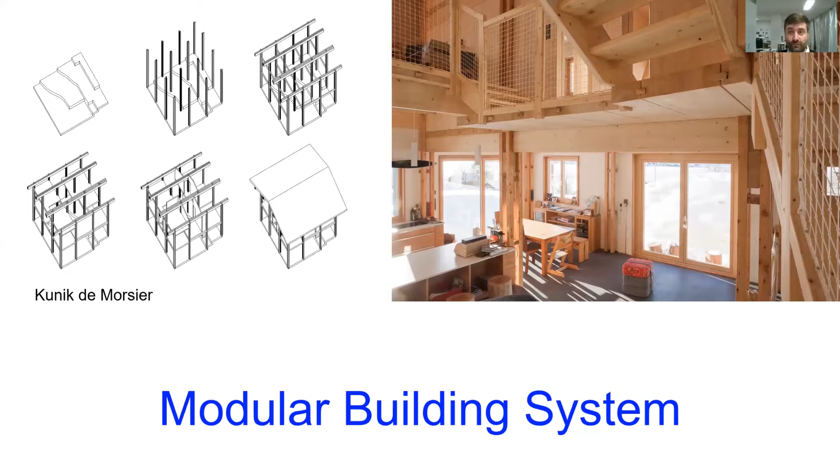Here you see the house, and you see the upper level, so to say, and the external items.

From that, we developed a series of competitions. This is one example where we try to go further in this idea to use wood in a structural way, and also use all the cutting technologies that we have here in Switzerland. We noticed that every timber builder has a CNC router, and that it's really easy actually to build complex structures. They use it to build very simple things, to cut simple pieces, but we could really go further in that and bring complexity into reality.

So it was an interesting competition. Unfortunately, we lost it, but the idea was to see how we can fabricate slabs that are not horizontal, but where the geometry is optimized to catch as much daylight as we can in the winter time.

And this geometry was really simple, or is really simple to build out of wood, because even if every piece of wood has its own geometry, it's machined, so there is no need of calculation. Everything comes out of the computer somehow.

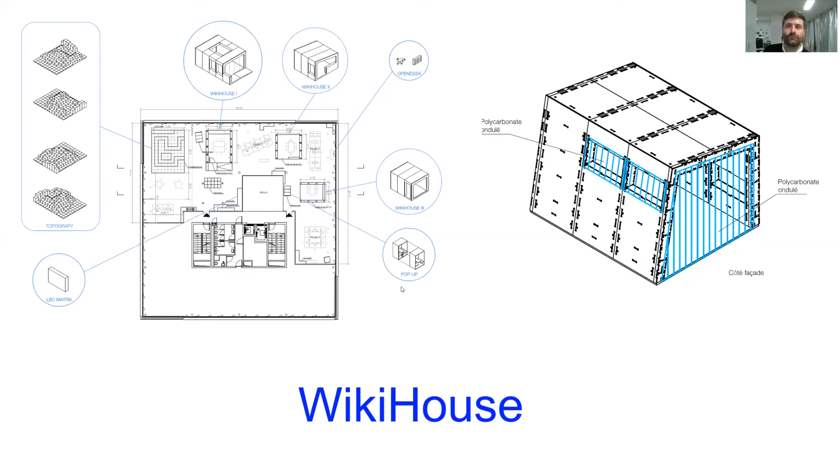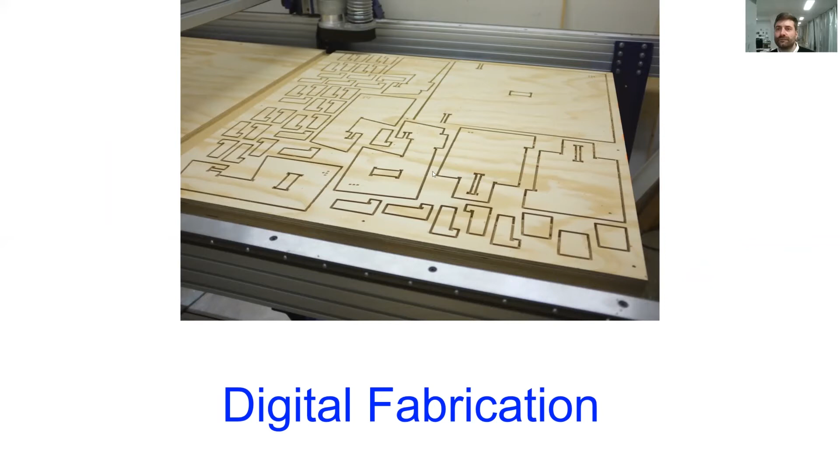It's really interesting because it works with only one type of timber panel, and everything is cut on a CNC router like this. All the pieces are extracted automatically and then printed at the carpenter, then assembled on site.

What's really interesting is that the system is lightweight, so you can handle every piece of that puzzle, and it's really quick to assemble. You can reach any shape that you need for the space. In that project, we built 3 different types, each with different acoustic conditions, light conditions, etc.

This is the second project I want to show. It's an industrial project, a big hall, and we also had to make a lab space and office space where there are boxes for meeting rooms, but also for labs, white rooms, dark rooms, etc. For that, we used augmented reality.

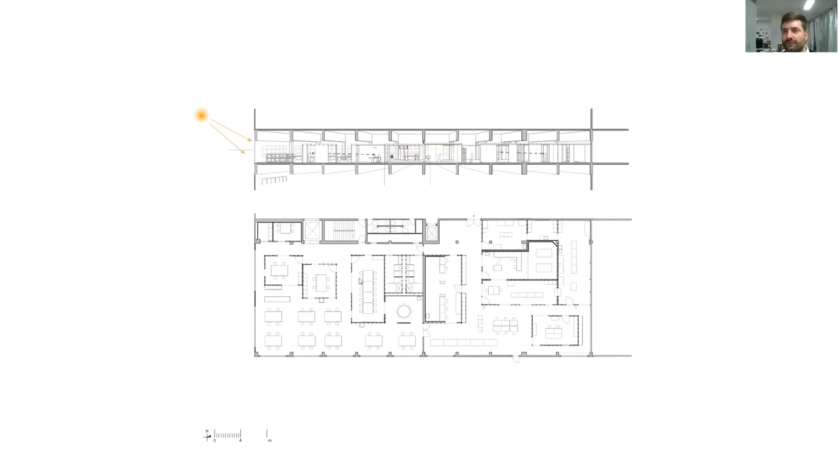I'll show you. So the first step was, since it was an existing building, to see how we can use daylight simulation to optimize the position of the boxes in the space. From that optimization process, we ended up with one optimal solution.

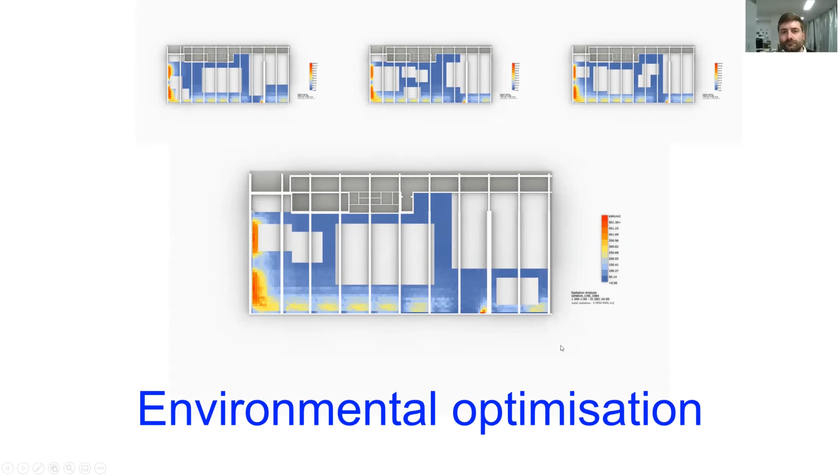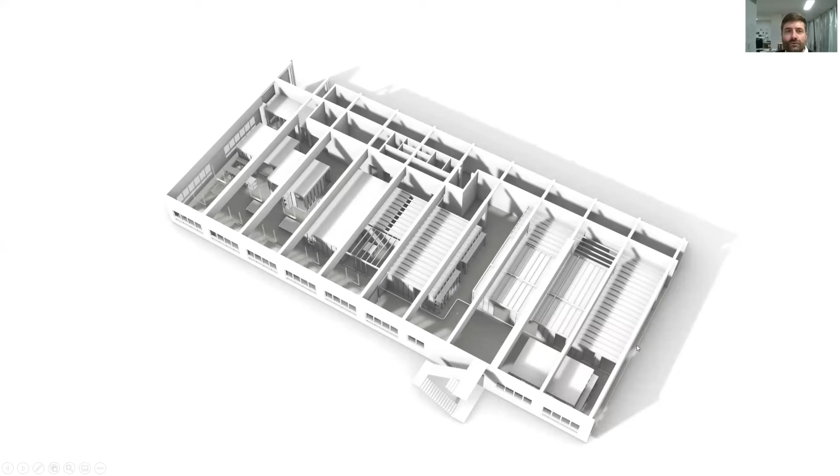This is the 3D model. We worked directly with the timber construction constraints, so you see the different layers. These are the roofs made out of foil, here are the hard roofs, the lighting system, and this is the 3D of the space.

This was made on Rhino. We tried the 3D, and from that we used a Fologram plugin that allows you to send the Rhino 3D model either to a tablet, a smartphone, or to HoloLens 1 and 2. So this is the space.

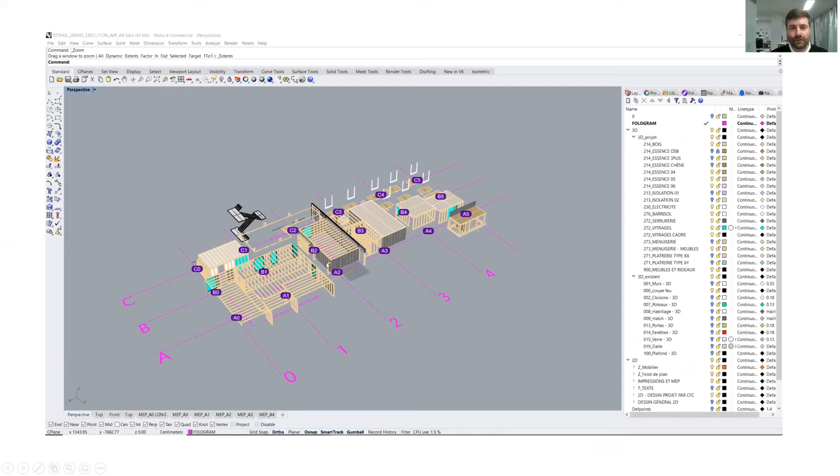We made a grid on the space, and on each point we made QR codes like this. This QR code allows you to geo-localize the project in the space.

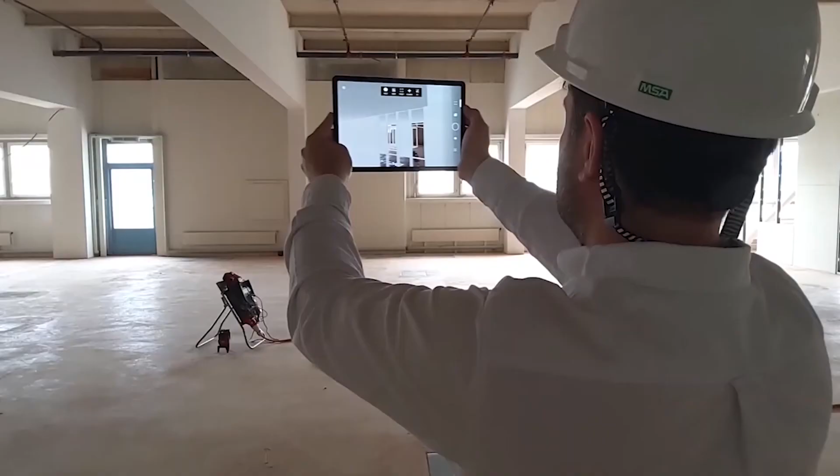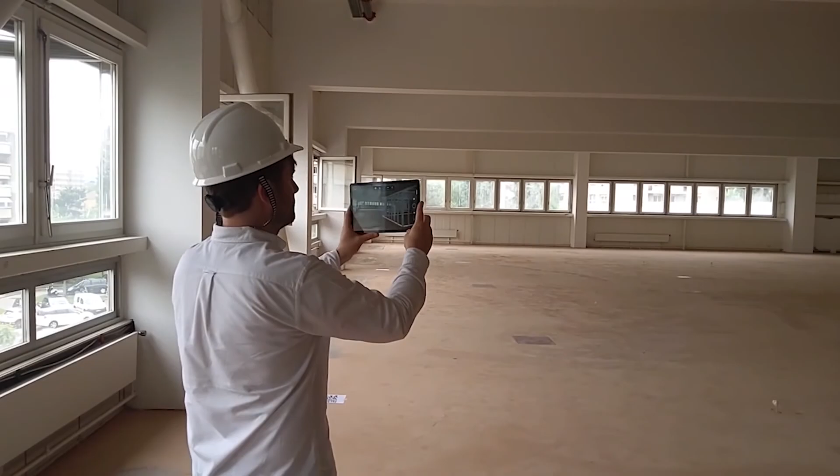I'll start a small video where you see I snap the QR code, and then the 3D model is overlaid on my tablet. So you can go through the space with the contractor, the stakeholders, the client, and the users, and test several versions.

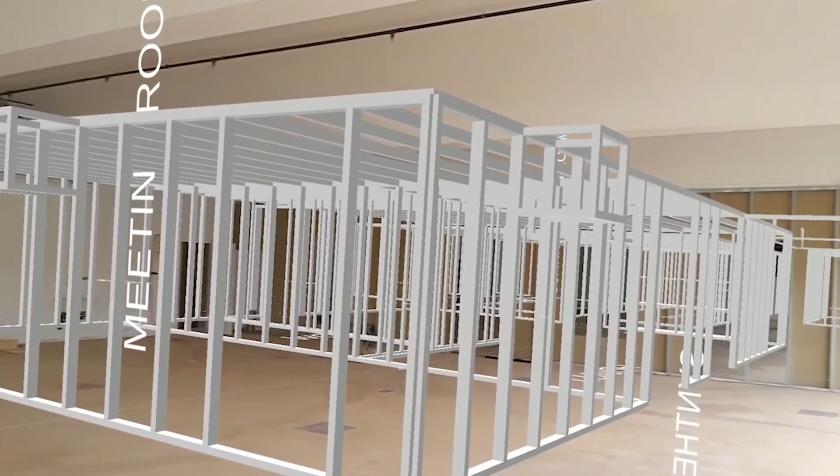Then you confront the project one-to-one with reality. It was really interesting for the clients, but also for the contractor, because we could see conflicts with the technical installations and so on. This is then 2 or 3 weeks later when we brought the timber elements.

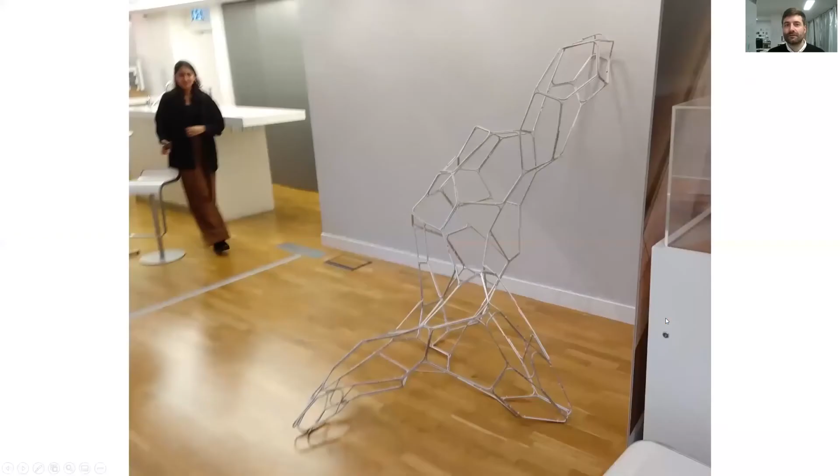This is a third project. It's smaller than the 2 other ones, but it's interesting because it goes a bit further in this idea of using AR or mixed reality in the field of architecture and design. So it was a training organized by Fologram, the Fologram program. We attended in London.

So this was the object we built, and all the plans and instructions were made using augmented reality. So the principle is it's a kind of complex structure where all the pieces have different geometries, and everything is built simply with aluminum rods. Here you see the rods.

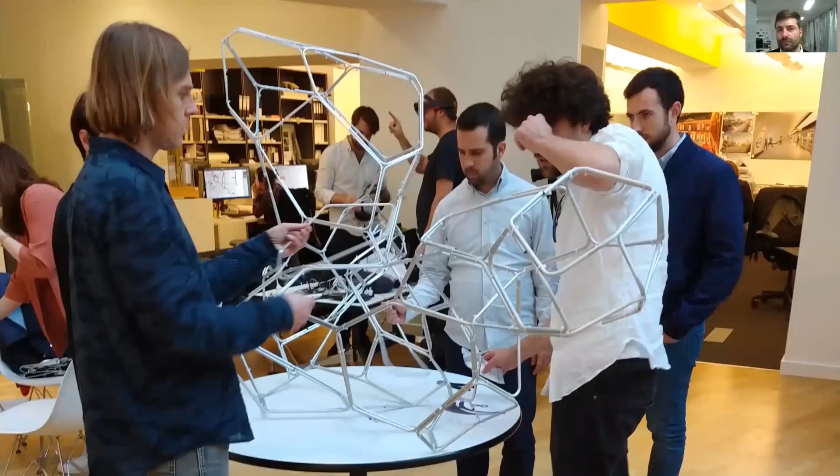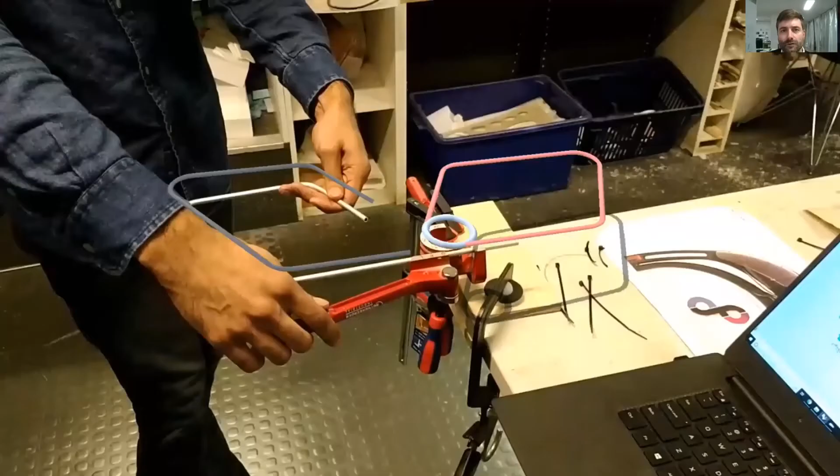And here, at the bottom of the screen, you see a small red machine. This allows to bend the rods. And here you see closely how the rods are connected all together. And here it's another video, so you will understand how every rod, which has a different geometry, is folded following the instruction coming directly from Rhino.

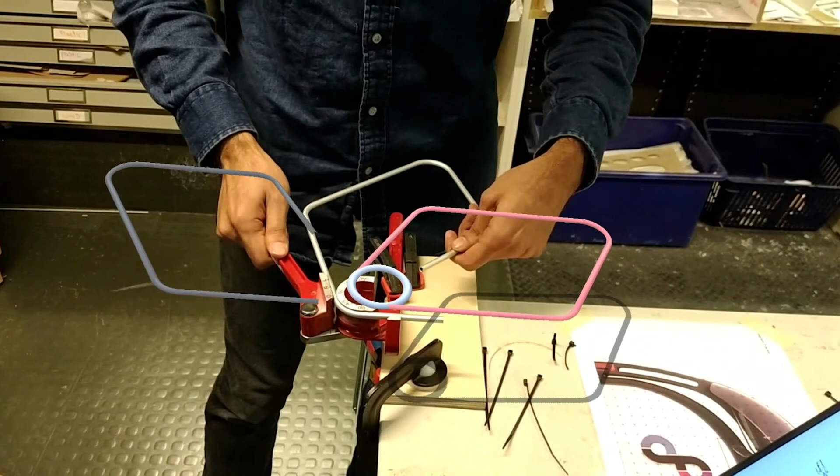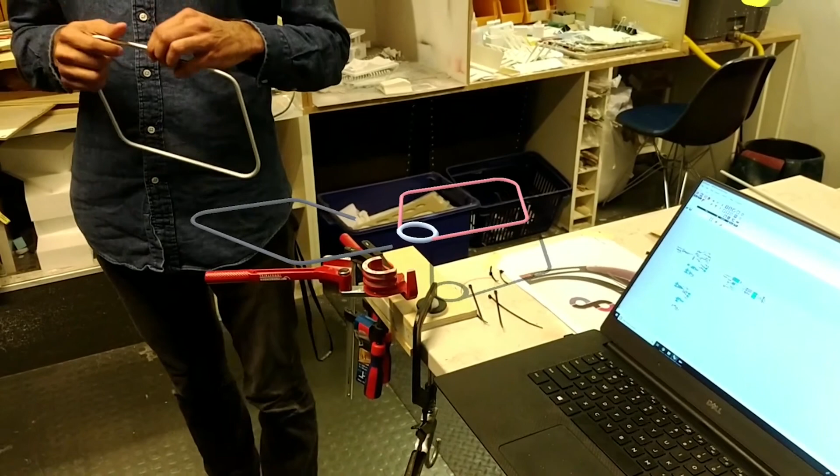So you see in red, this is the shape you must reach. And so just follow the instruction. And there is a small gap because I'm shooting with the camera, but the operator is using the HoloLens, and the precision is like millimetric. So it's really enough, the precision you have to do these kinds of things.

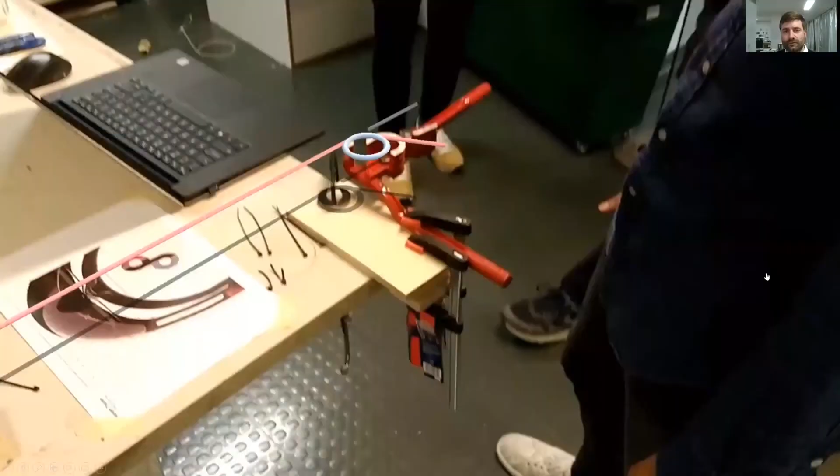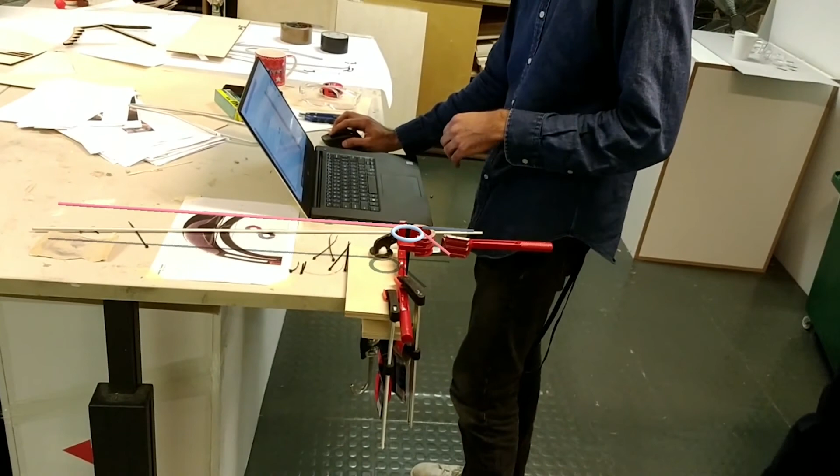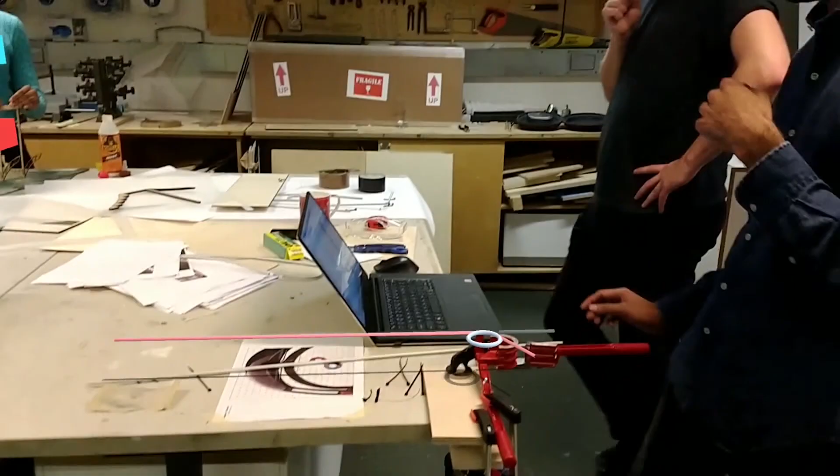And this is another one. Okay. Here you will see the whole process. So this is the rod, you see in red the objective, and here in AR also you have the buttons to go from rod to rod, and when you select one rod to go to bend 1, bend 2, and bend 3. And then when you make your bend, it's mixed reality with the HoloLens, so you can snap that shape and it goes to the next one. So it's really made to work in a workshop environment, I would say.

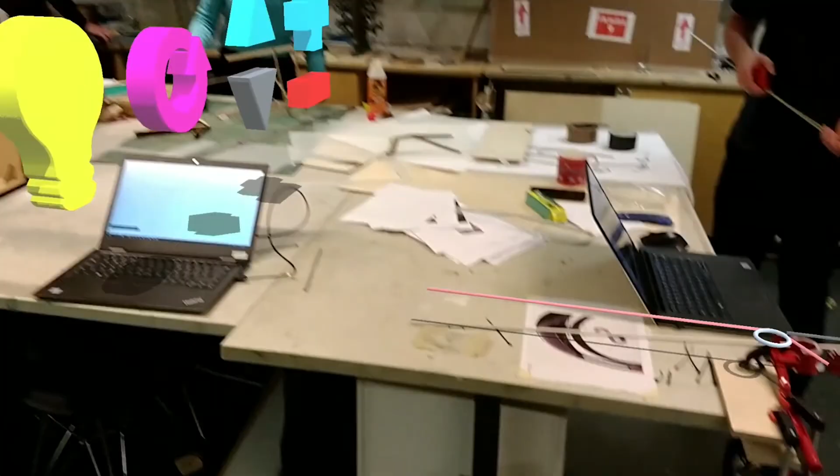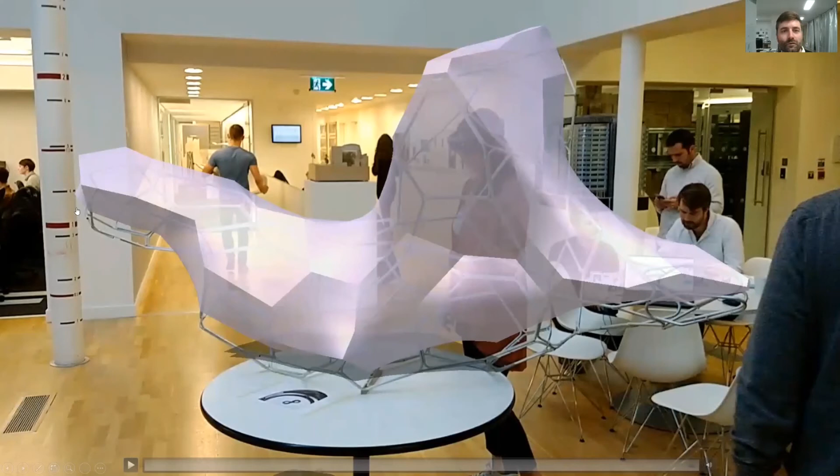Put it quicker. So here, yeah, they are cutting the rods to the right dimension, and then the fold, you saw it before. Yeah, and this is the finished structure, and we even had some fun putting a kind of facade on top of it in the end, dynamic sheets.

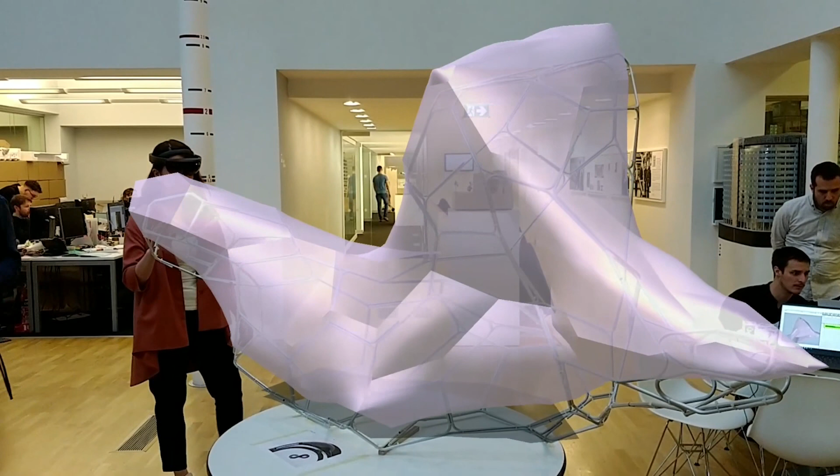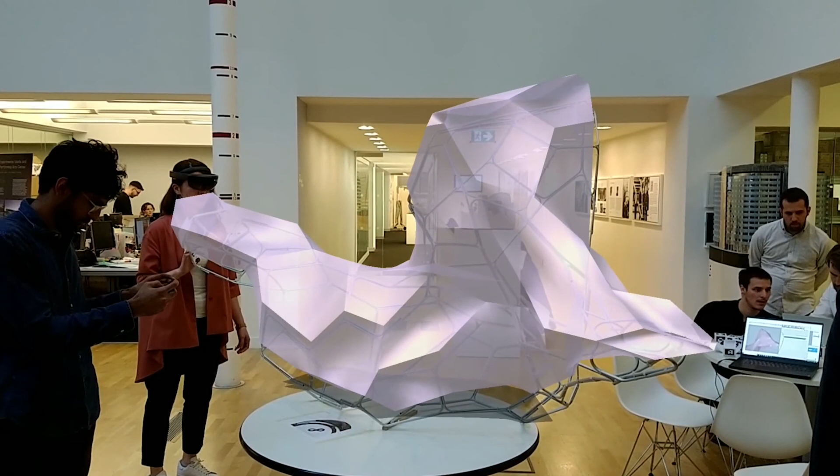So it's really interesting because it's a very small object, but it shows the possibility that we have to go directly from a 3D model to construction instruction, and somehow we can get rid of the idea of the plan, printing plans, of reporting dimensions. Everything can be overlaid and cut, bended, whatever you need to do in a workshop or on a building site.

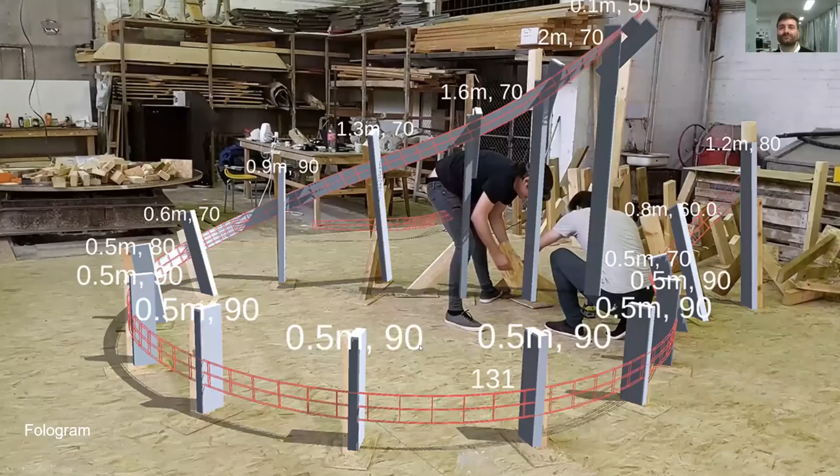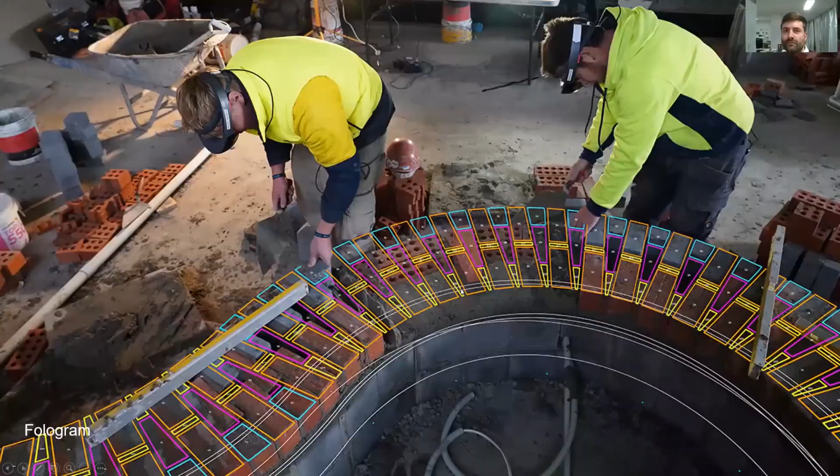Sorry. So from that, the next step we are now interested to develop is to bring more complexity into the design by, as I showed before, overlapping complex geometries in a workshop environment. Also here you see this is also possible with brickwork, for example, where all the brick layers can follow the geometry that you overlay.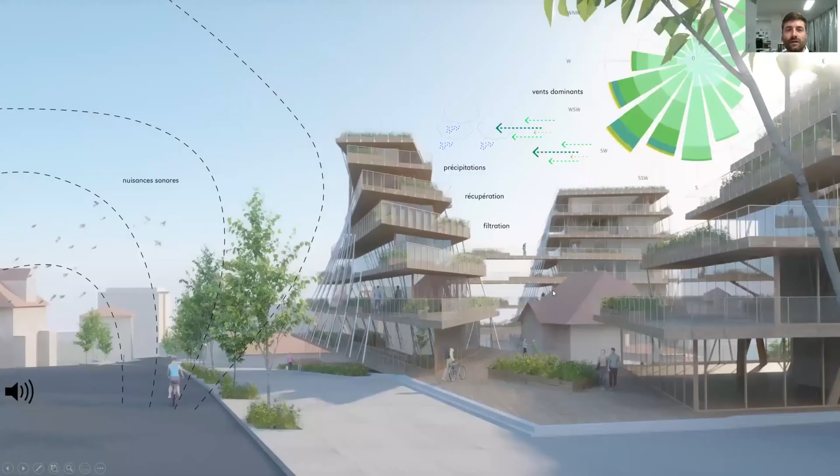And this is another thing. This is a competition we did recently that we want to develop through Agile Space, to see how we can, on a site, start to visualize environmental factors like the wind, like rainfall patterns, like sound, all the invisible things you don't see when you visit a site once, but bring this big data that exists in the site through these technologies. That's something we are really interested to develop further.

This is another image where you see we overlay this information to see how the design can really directly relate to that.